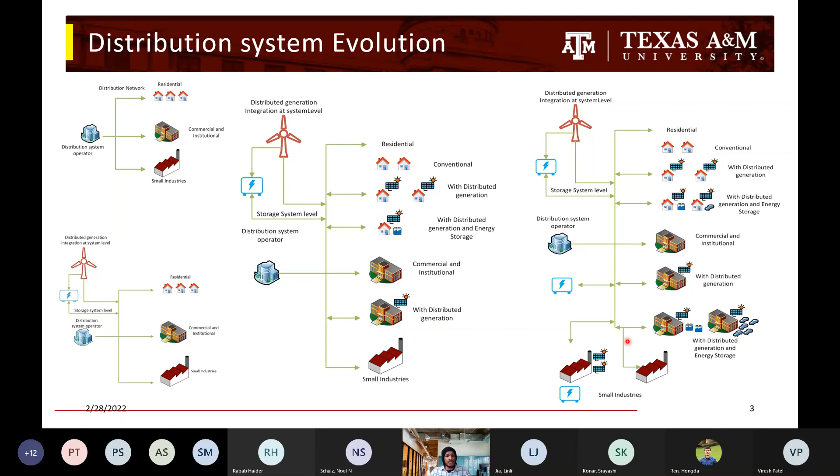Within these systems, with higher penetration, there are DGs, energy storage, and EVs installed behind the meter at the residential systems. At the commercial and institutional systems, we have DGs and energy storage installed behind the meter.

Now, let us come to what reliability is in the context of distribution systems. Before going there, let us define reliability in power systems. Power system reliability is concerned with the ability of the system to satisfy the load while operating in a manner that respects the capabilities of generation, transmission, and distribution components. There are several measures to indicate underlying probability, but most of the time we use power system reliability indices to measure the reliability of the system.

Due to the size and complexity of power systems, the reliability of an entire power system is never evaluated at once; instead a set of sequential studies are performed, like generation system adequacy studies, transmission system studies, and distribution system studies. Consider a distribution system with 4 load points. Power flows from the network to the customers through the system elements and the distribution transformer. Failure of any element between the supply point and the load point will affect the customer.

Consider a failure of a section in the main feeder. A circuit breaker operates and disconnects the entire feeder. Once the line is disconnected, the circuit breaker is closed again, and power is only supplied to load point 1 of the distribution system. This constitutes a stage 1 distribution system. Now let us assume a stage 2 distribution system where there is alternative supply and the rest of the system is supplied through that alternative power.

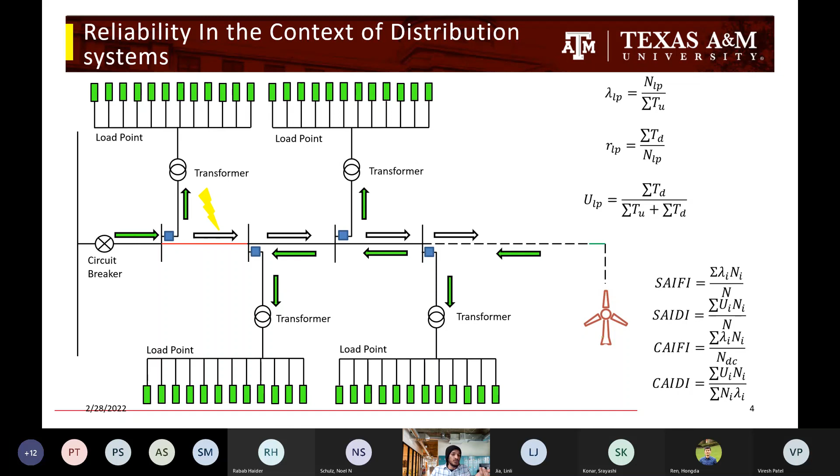Let us look at the same system, but with DERs connected behind the meter, indicated with the blue squares behind the load points. Power flow happens from the network to the customer. An assumption here is that the DERs are able to supply the full load of the customer. There could be a failure in the distribution system similar to the one we have seen earlier. If there is a failure in the lateral feeder, the load point connected to that feeder experiences an interruption, and the customers without DER connected to the failed feeder will experience an interruption.

The important point to note here is that even though the load point experiences a failure, not all customers connected to the load point are interrupted, because the DER installed behind the meter will take care of the customer's load.

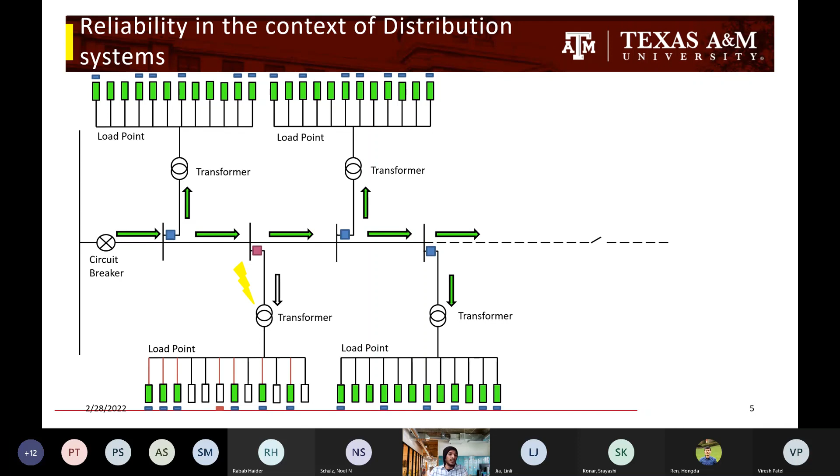Now let us look at this reliability context by a numerical example. Now consider the simple system with two load points. The load point data shows that there are 20 customers in total, with 10 customers connected to each load point. Now let us evaluate this system average interruption frequency index from the basic definition, which is the sum of total customer interruptions over the total number of customers.

Now in case 1, the system is assumed to be a traditional system with no DERs installed behind the meter. Now each customer is interrupted only when the load point is interrupted. Therefore, the failure of customer is equal to the failure of the load point. Now when we do the math, it comes down to the formulation using the load point indices.

Now consider the same system in case 2, where the customers are having behind the meter DER. Now the assumption is that the DERs are perfectly reliable and supply power whenever there is a failure. And another assumption is that half of the customers have DERs and half of the customers do not have DERs.

Now, while using the index definition to calculate system average interruption frequency index, we can see that only half the customers will ever experience a failure when the system fails, and the other half will always be supplied by DER irrespective of the system condition. Now, in this case, load point reliability indices cannot be used to evaluate the system indices. While the example assumes simplistic scenarios, it proves that the fundamental approach to use the load point reliability indices does not work with behind the meter DERs.

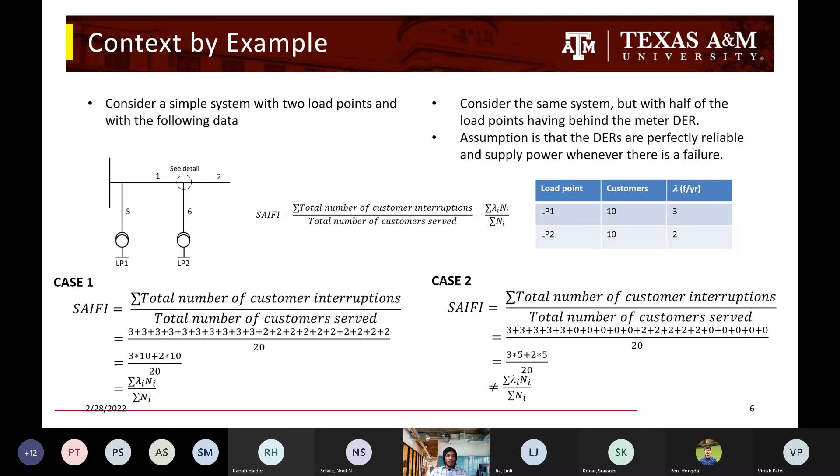Now, to that end, we propose a framework, a 3-level hierarchical framework, like the reliability assessment of the bulk power system. The 3 levels are divided based on the complexity of modeling, objective of analysis, and authority of control over the equipment and components installed. Now, these 3 levels include various aspects of the modern distribution systems.

Now, in level 1 evaluation, DERs at the feeder level are considered, and we evaluate the primary load point indices. Now, there are numerous methods to evaluate primary load point indices in the literature. The base level of reliability is provided by the distribution system operator, whereas the DG and the energy storage systems connected to the system level will boost the reliability of the load points.

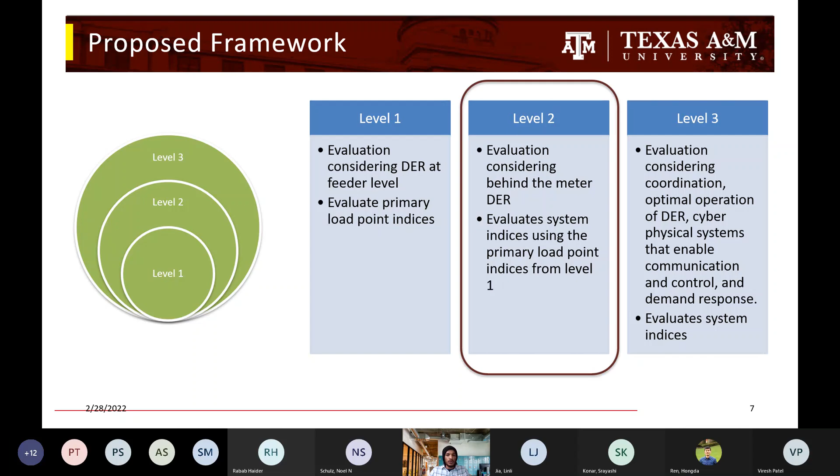Now, level 2 evaluation builds upon the primary load point indices evaluated in level 1. This level considers behind the meter installations of the customer and their effect on the system reliability. Now, in level 3, we consider coordination of resources in the system, optimal operation of DERs, cyber-physical systems that enable communication, and control strategies. So this work is heavily focused on level 2 assessment and a part of the level 3 assessment of the distribution system.

Now, the method to evaluate the level 2 indices of the system. As mentioned earlier, we use load point reliability indices from level 1 as input and include the effect of having DERs behind the meter to evaluate system indices. But how do we achieve that? We achieve that by evaluating the equivalent load of the customer. Now, what is equivalent load? It is the demand seen by the system from a customer after considering behind the meter DERs.

Now it is very simple to evaluate. The green curve here is the hourly load curve, and the red curve is the equivalent load curve, which is obtained by subtracting the energy supplied by the on-site DG. Now, the equivalent load captures stochastic nature, variability, and availability of the DG and the ES systems. So we have the equivalent load.

So how do we calculate the system indices? Now we must go through each customer and evaluate the interruption indices for each customer, and it is done using Monte Carlo simulations. Now we create artificial load point operating history using the basic load point reliability indices. We calculate the uptime and downtime using the reliability indices, assuming that the failures are exponentially distributed.

Now then we look at the equivalent load and look at when the DGs are not able to supply in case there is a load point failure. And then we calculate the average interruption frequency and average interruption duration using the interruption duration and interruption times.

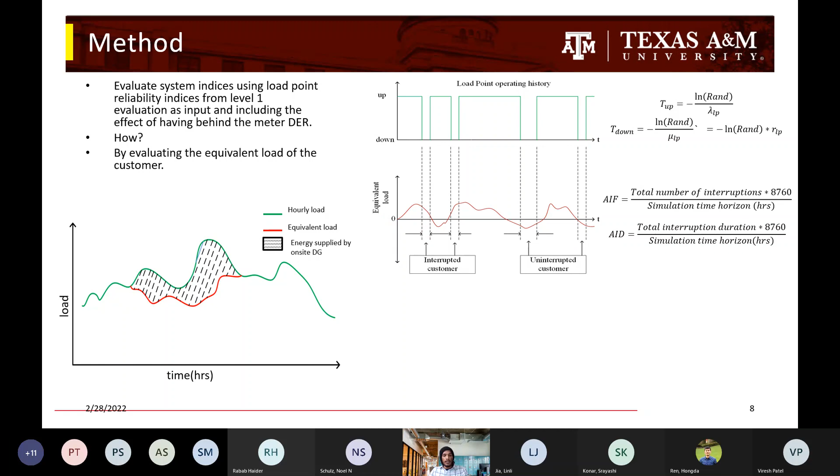In the current literature, the fundamental approach to evaluate system indices is to evaluate the load point indices and then use them to evaluate the system indices. Now, in the newer approach that we propose, once we evaluate the interruption indices for each customer, we can evaluate system indices using the formulations developed here.

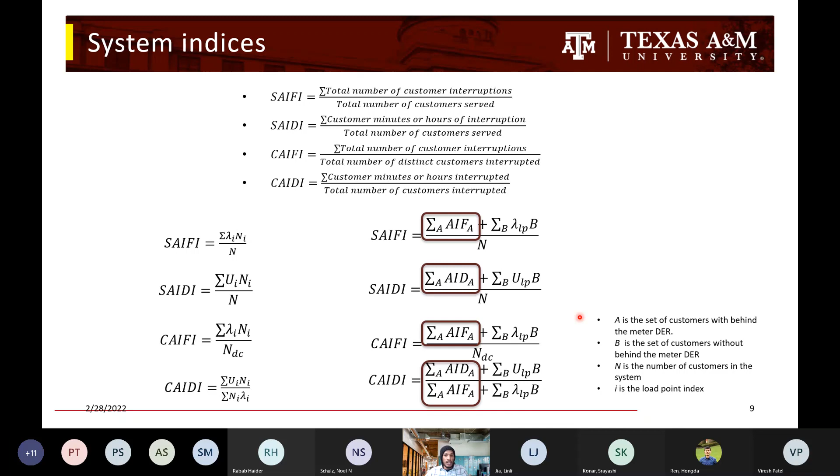Now, SAIFI, as seen earlier, was total number of customer interruptions over the total number of customers connected. Now, in this new formulation, where A is a set of customers with behind the meter DERs, each customer average interruption frequency is evaluated and then summed up with the customers without any DER. Now, the problem boils down to calculating the equivalent load of the customer.

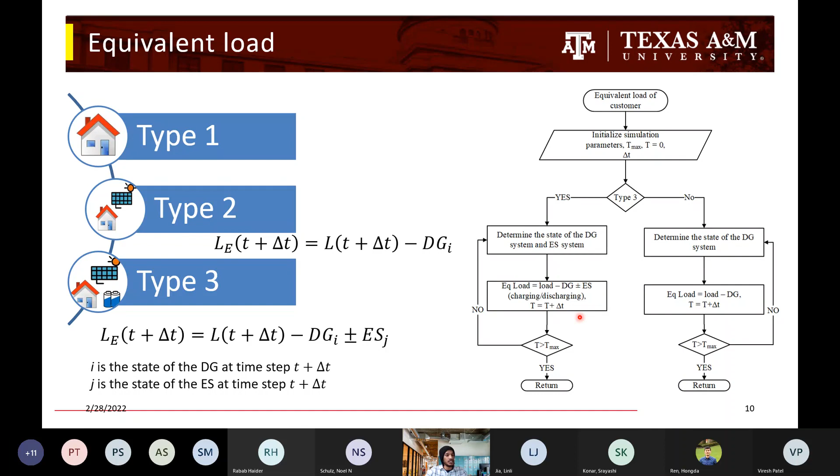When we consider the modern distribution systems, not all customers have behind the meter DER. We can intuitively categorize them into three types based on the DER installed behind the meter. Type 1 without any DER, type 2 with only distributed generation, and type 3 with distributed generation and energy storage. Now, the widely used DER behind the meter is the PV system, and to that end, we developed a reliability model to calculate the equivalent load of the customer with PV systems.

Now, PV systems employed on the rooftops have solar panels and inverters as main components, and microinverter configuration is used in this study. This module is called an AC module. The AC module subsystem is modeled as a single unit with two states, but a typical customer with behind the meter PV system will have multiple AC modules connected to form the PV system as a whole.

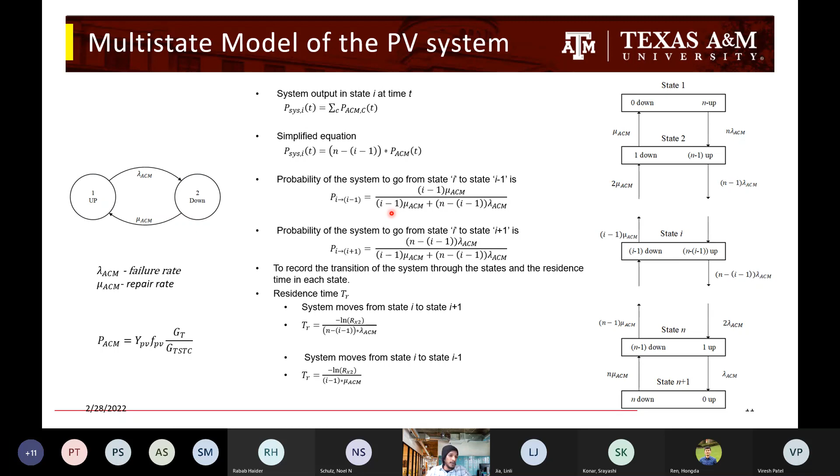A PV system is a generating system, and usually generating systems are modeled as 2-state or 3-state systems with an additional state for derated operation. Here, we model the PV system as a multi-state unit. For an N module PV system, we model it as an N+1 state, including the zero capacity state. From the state transition diagram, we can calculate the power output. We can calculate the probability of the system in a particular state to go from state I to state I+1 or I-1. And we can also calculate the residence time in each state.

A similar model for the energy storage is also developed for type 3 customers, where the state of charge at each time step is evaluated. Now, these models are applied to the Roy Billinton test system bus 4, which is a distribution test system with 38 load points and 4,779 customers. This system is assumed to be in a location in Phoenix, Arizona, and out of the 4,779 customers, 4,700 are residential customers. From the analysis, the residential customers are assumed to be of different mix.

We also proposed a test case. Sorry for that. Just give me a moment.

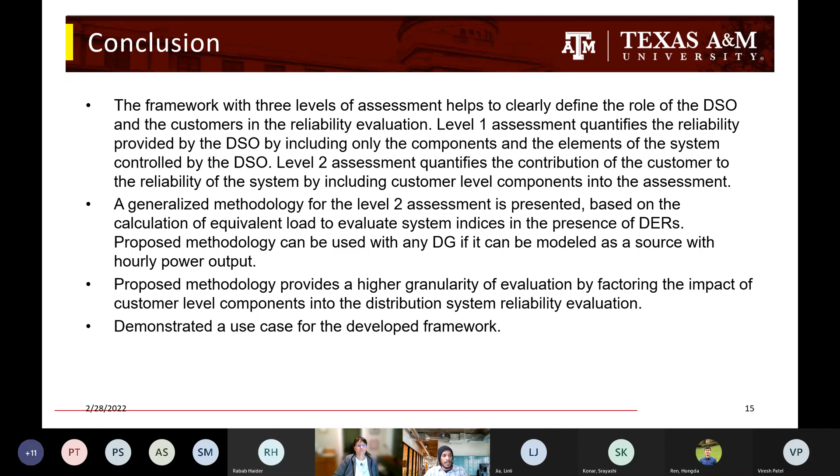All of this has been submitted and accepted into a journal, and we have also recently submitted a paper to IEEE Access with the use case. The future work is to evaluate the energy-based indices and do a bunch of sensitivity analyses. And the major work going forward is to integrate demand response in the reliability evaluation of the system.

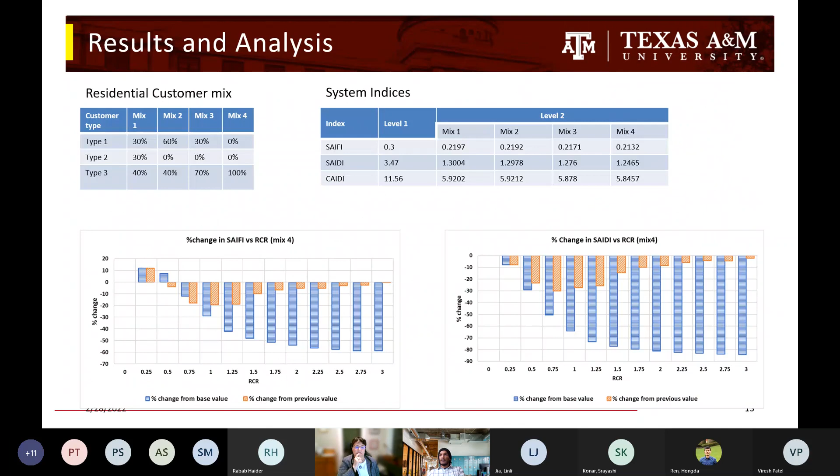Yeah, so how do you see this reliability information impacting how we would do different activities in different parts of the US, as we might have regional strategies related to DERs? Yeah, so one thing that we found is that especially in the southwest part of the US where the GHI is higher, system reliability is very high when we use DER comparable to the peak load of the system, and the load factor here is very low.